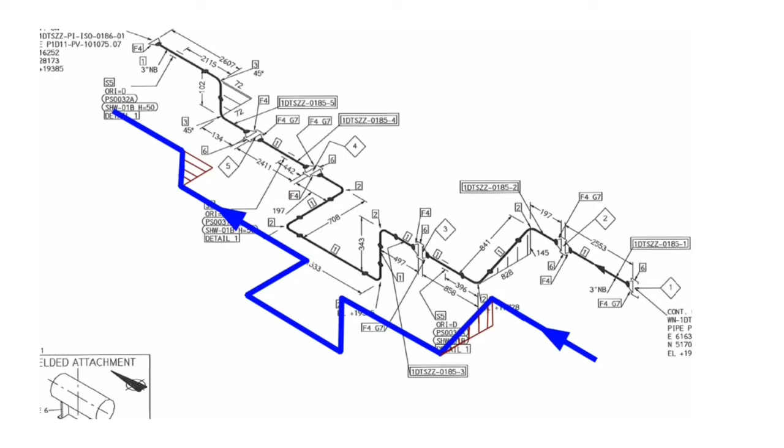We are pleased to provide you 6 different piping educational tutorials in this video.

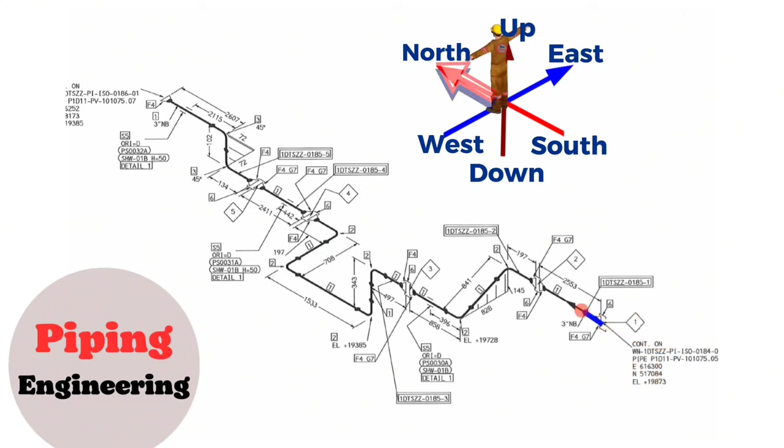At this point the pipeline first turns downwards with a 90-degree elbow, then turns westwards. Then the pipeline turns northwards with a 90-degree elbow. At this point, the pipeline turns downwards with a 90-degree elbow. Then the pipeline turns northwards with a 90-degree elbow again.

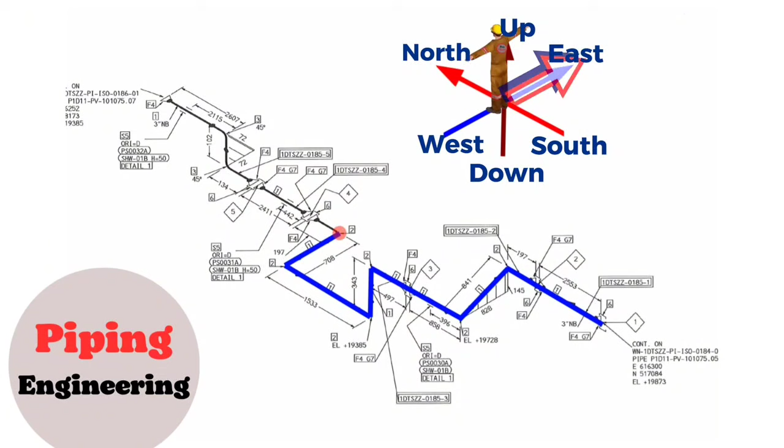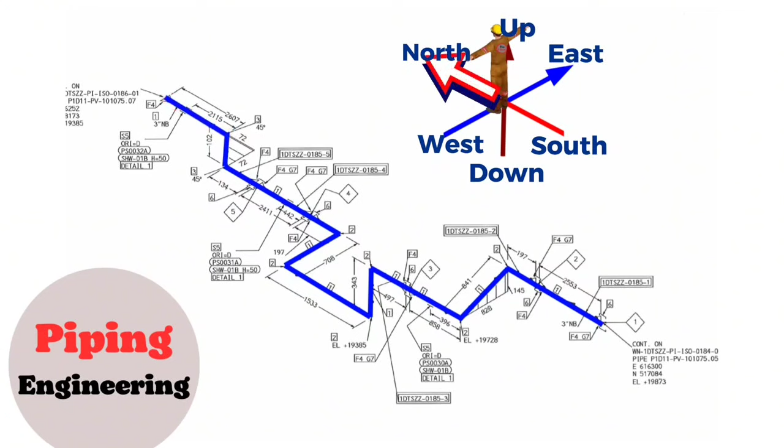At this point the pipeline turns eastwards with a 90-degree elbow. Then the pipeline turns northwards with a 90-degree elbow again. At this point the pipeline first turns eastwards with a 45-degree elbow, then turns northwards. At last the pipeline continues northwards with a 45-degree elbow again. And reading the piping isometric drawing is successfully completed.

I'm separating these bold lines that we've drawn along this pipeline from the isometric drawing and showing them separately so that the pipeline isometric drawing is easier to read and understand. By using this method, you can easily read and understand any piping isometric drawings. This education video is finishing here.

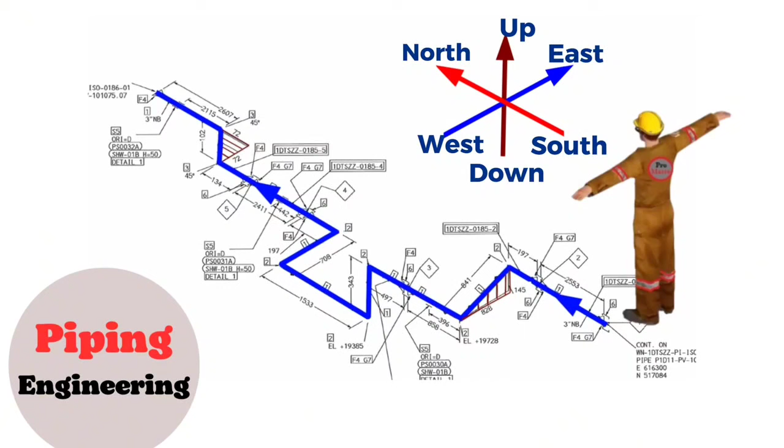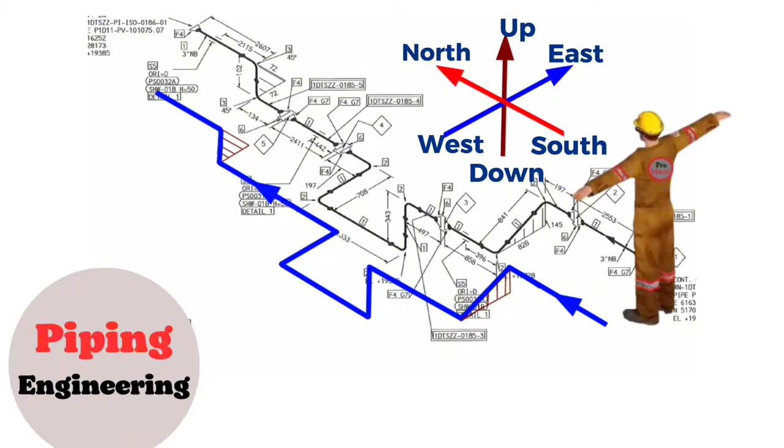We are continuing our tutorial with the next video. In this video, we will learn how to read a pipe drawing, the list of materials and directions on the drawing. Then we will bend the wire according to the pipe drawing. Also, at the end of the video, we have prepared a 3D view of this pipeline so that you can get an easier idea of the pipeline. Such videos help improve the knowledge and skills of pipe fitters.

This is the pipe isometric. This is the list of materials on the drawing. These are the directions. Let's find out the materials needed during the fabrication of this pipeline. These are the detail numbers of the materials on the drawing.

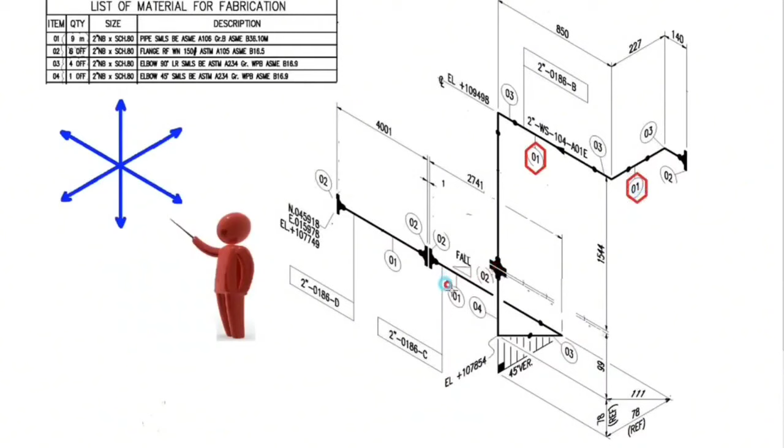These are detail number 1. We look at the material list. Detail number 1, 9 meters, 2 inch, schedule 80, pipe, ASME A106.

These are detail number 2. Let's look at the material list. Number 2, 6 pieces, 2 inch, schedule 80, flange, raised face, weld neck, class 150.

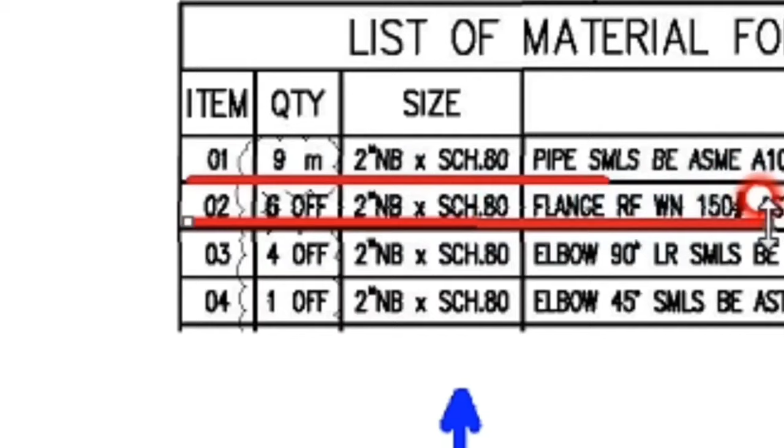These are detail number 3. Let's look at the material list. Detail number 3, 4 pieces, 2-inch, schedule 80, elbow, 90-degree, long radius.

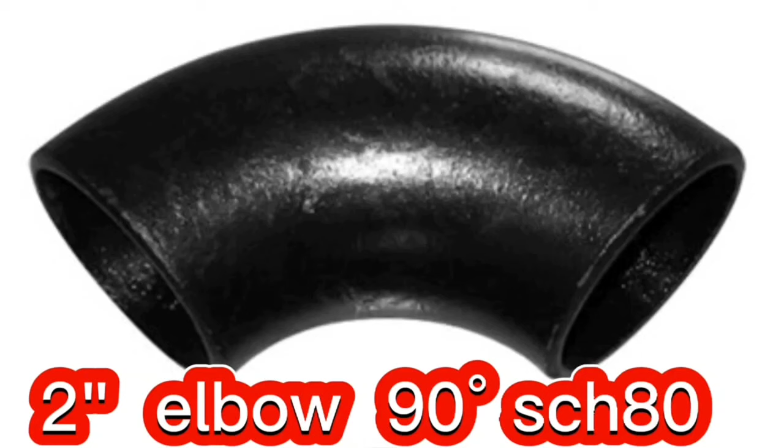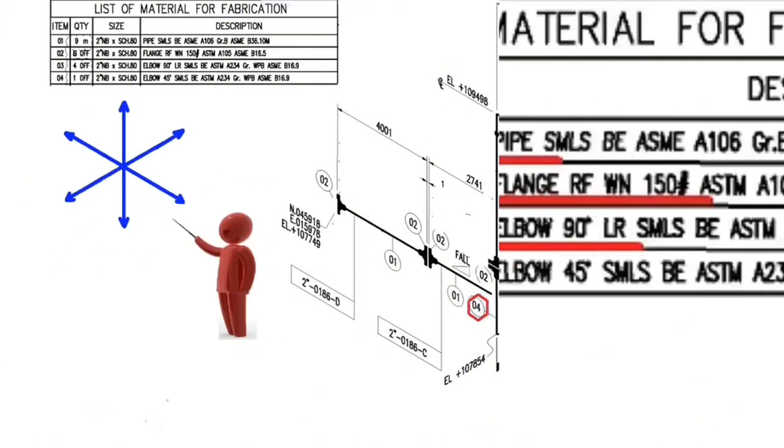This is number 4, the last detail. We look at the material list. Detail number 4, 1 piece, 2 inches, schedule 80, 45-degree elbow.

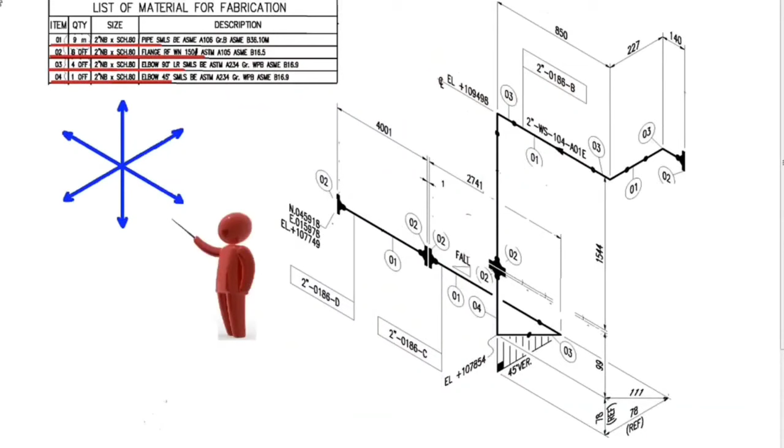To read the drawing correctly, we must first learn these directions. These are the lines that show the directions. This is the north. This is the south. This is the east. This is the west. This is the up. This is the down.

A person who wants to read a drawing should imagine himself at the intersection of these directions. Then that person's face will look to the north. His back will look to the south. His right hand will look to the east. And his left hand will look to the west. His head will be up and his feet will be down.

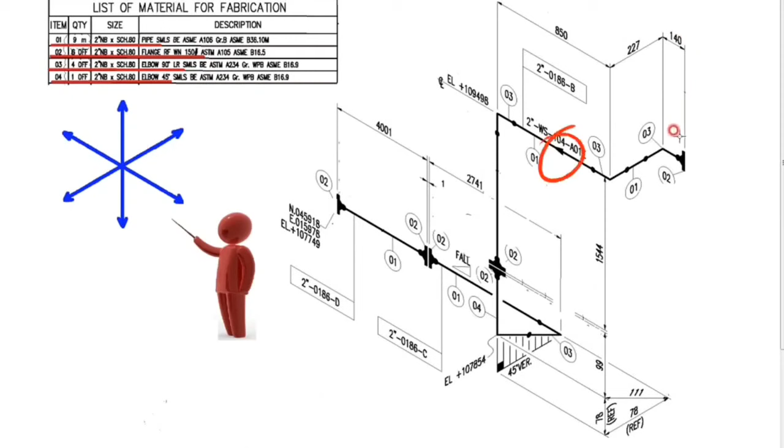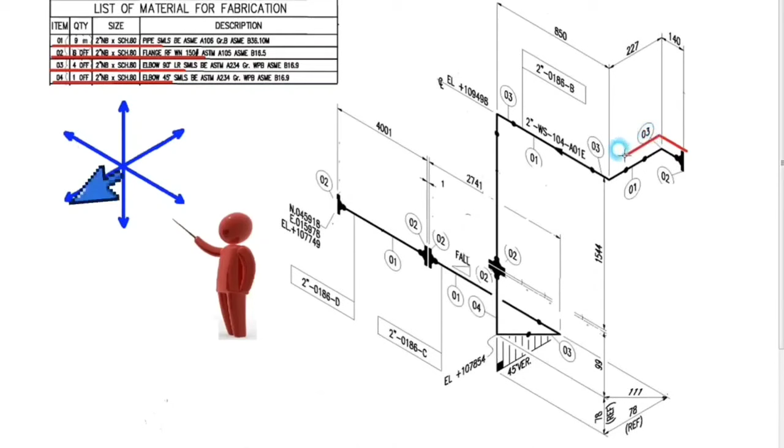Let's read the pipe drawing with the help of these directions. There is an arrow on the pipe, so let's read the pipe drawing in that direction. First, the pipe goes to the north. Then the pipe goes to the west. Then the pipe turns to the north again.

Then the pipe goes down. After this point, we continue down. From this point it turns east at an angle of 45 degrees. Finally, we are going to the north. We finished reading the pipe drawing.

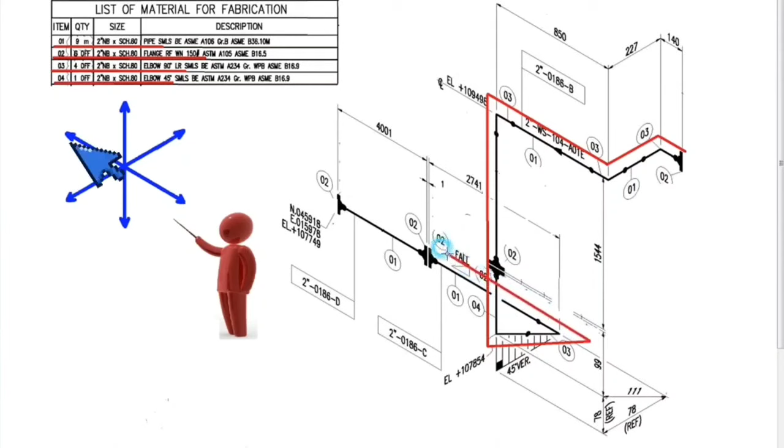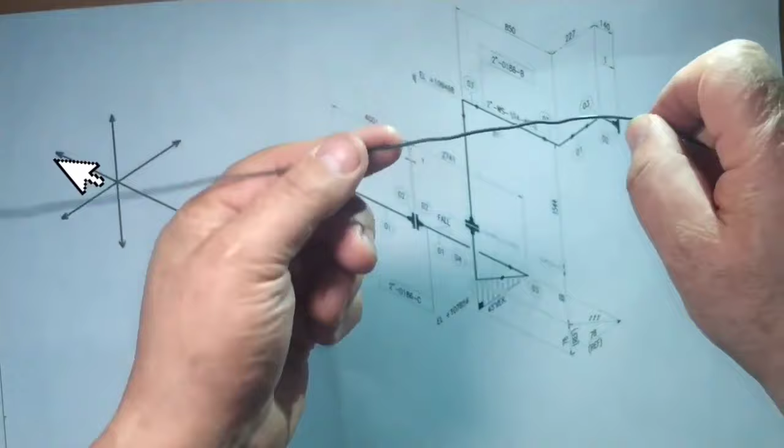Let's bend the wire according to the pipe drawing. This is our wire. Let's bend the wire of this pipe isometry with the help of these directions. We hold the wire in the north direction. Then we bend the wire in the west direction. Then we bend the wire again to the north direction.

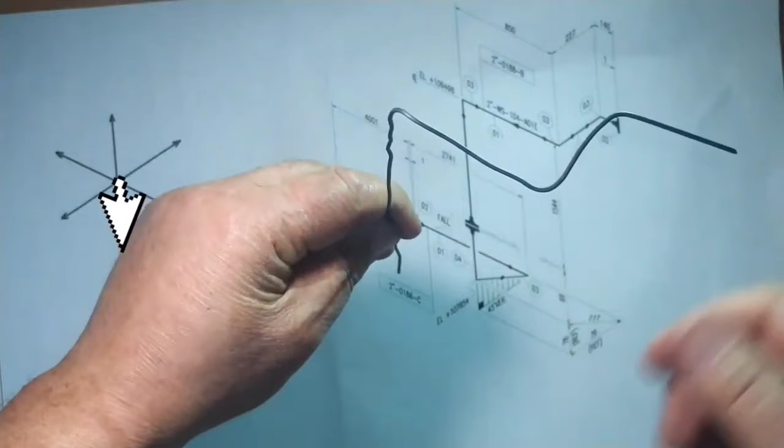Then we bend the wire down. From this part, we bend the wire down east, at an angle of about 45 degrees. Finally, we bend the wire to the north direction. Wire bending is finished.

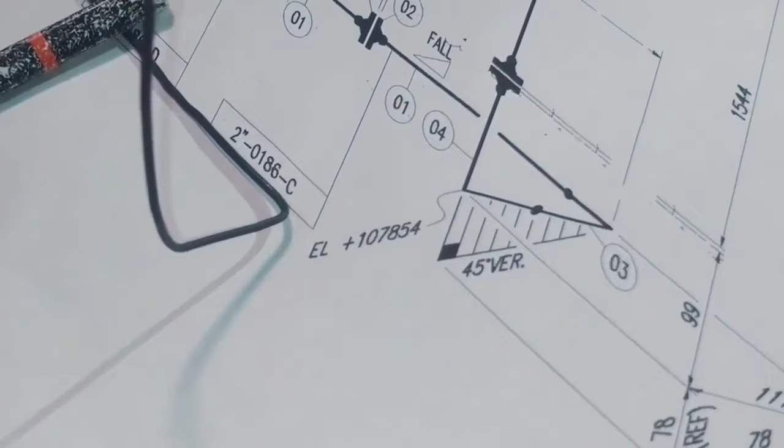Let's look at the 3D model of pipe isometrics. This view helps to fully understand pipe isometrics.

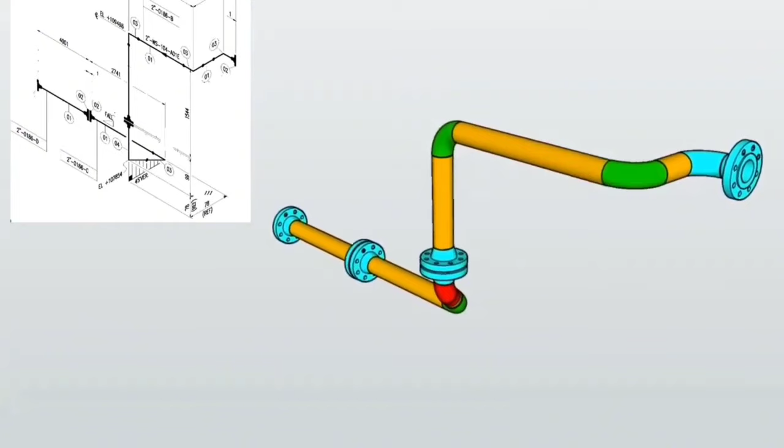We are continuing our tutorial with the next video. In this video we will learn reading the pipe drawing easily and watch a 3D model of a pipeline isometric. This video is very useful information for pipe fitters. You can easily learn pipe drawing if you watch the video carefully. A good knowledge of piping drawings helps pipe fitters succeed in job interviews.

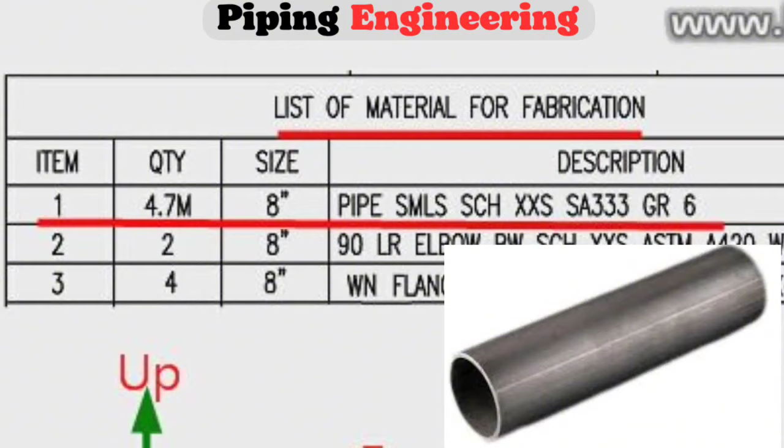Item number 1, 8-inch pipe. Schedule is XXS, the material is carbon steel, SA333 grade 6. Total length used 4.7 meters. Detail number 2 was used in two places in the pipe drawing. Let's look at the material list.

Item number 2. The size is 8-inch. Elbow 90 degree, long radius, schedule is XXS, ASTM A420, the quantity 2 pieces. Detail number 3 was used in 4 places in the pipe drawing. Item number 3 is 8-inch weld neck flange, A350, the quantity is 4 pieces.

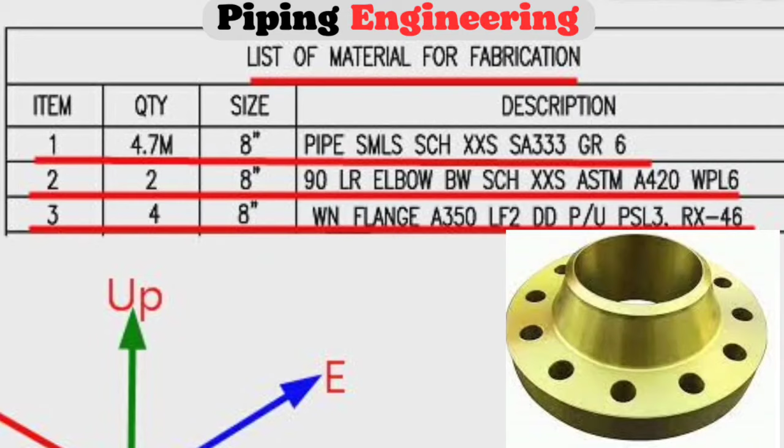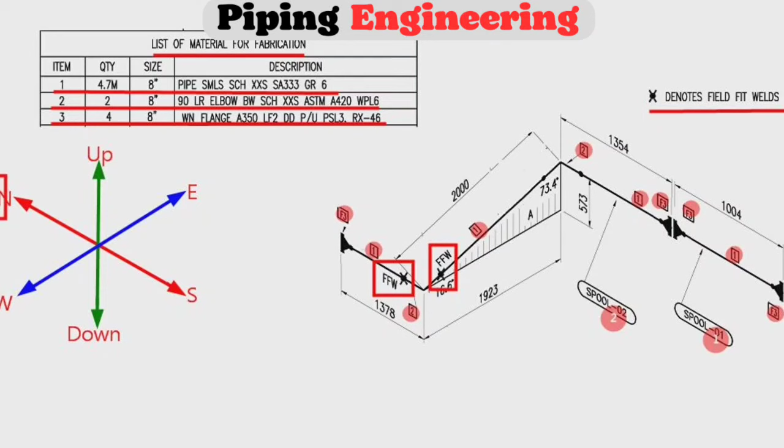Every pipe drawing has such a sketch; this indicates the directions. By studying these directions, we can easily read any pipe isometric. There are 6 directions here. N stands for north. S stands for south. E stands for east. W stands for west. Up stands for up. Down stands for down. Let's try to read this pipe isometric using these directions.

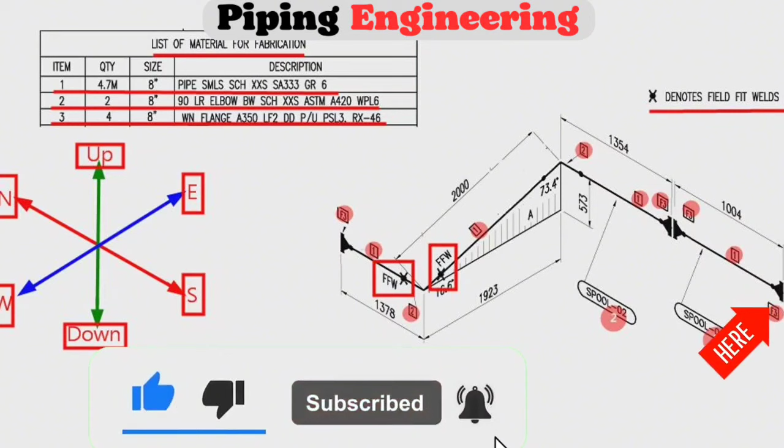We will start reading the piping isometric from this point. The pipeline travel starts from this point to the north direction. Then the pipeline travels down 573 mm, then turns to the west direction for 1923 mm. At this point, the pipeline travels to the north direction. So, the correct reading of the pipe drawing is completed.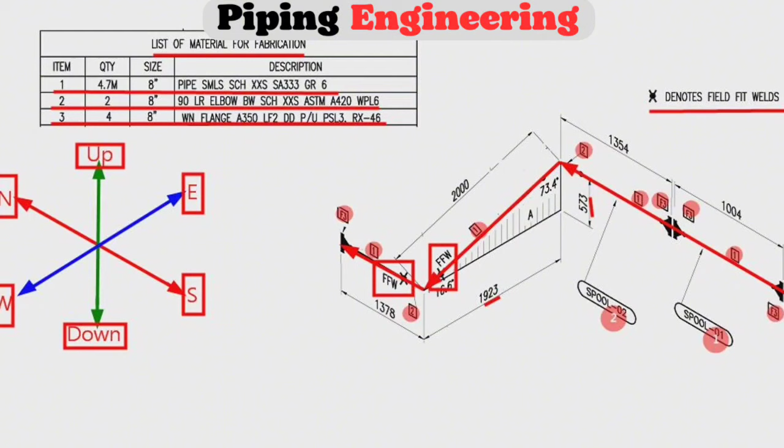Let's look at the 3D model view of this pipeline. The 3D view of the pipeline helps us understand pipeline isometry more easily.

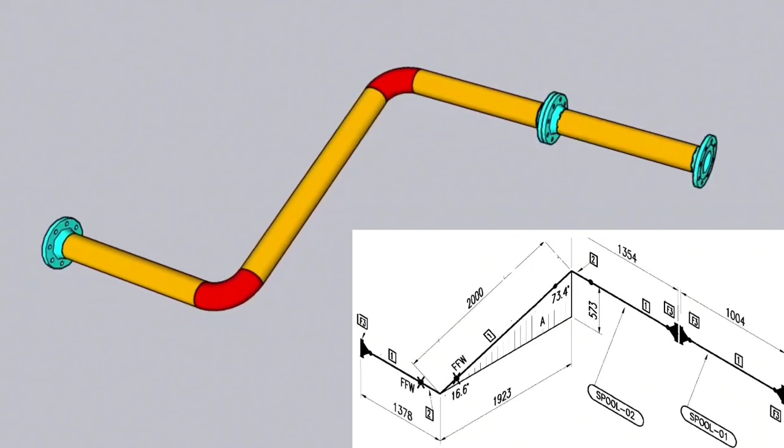In the next video, in this video we will learn reading the pipe drawing correctly and watch a 3D model of the pipe isometric. Then we will bend the wire in the pipe drawing according to the rule we learned. This is very useful information for pipe fitters. Let's start the video. This is the pipe isometric drawing.

This is the list of material for fabrication. In this drawing there are two separate pipe spools. This is the first spool. This is the second spool. Let's learn the materials which are used in the pipeline. Detail number 1 was used in several places in the pipe drawing. Let's look at the material list.

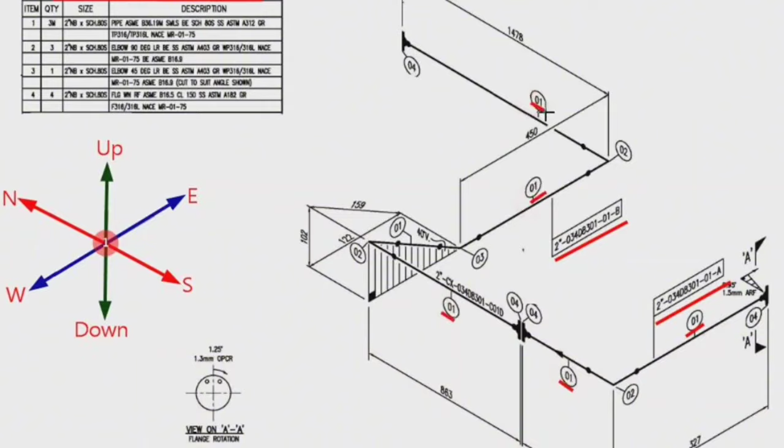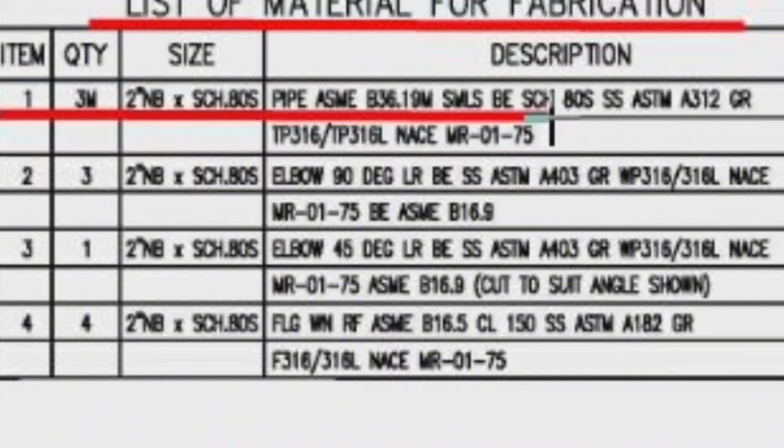Item number 1: the quantity is 3 meters, 2 inch schedule 80S pipe, the material is stainless steel. Detail number 2 was used in 3 places in the pipe drawing. Item number 2: the quantity is 3 pieces, 2 inch, schedule 80S, elbow, 90 degree, long radius, the material is stainless steel.

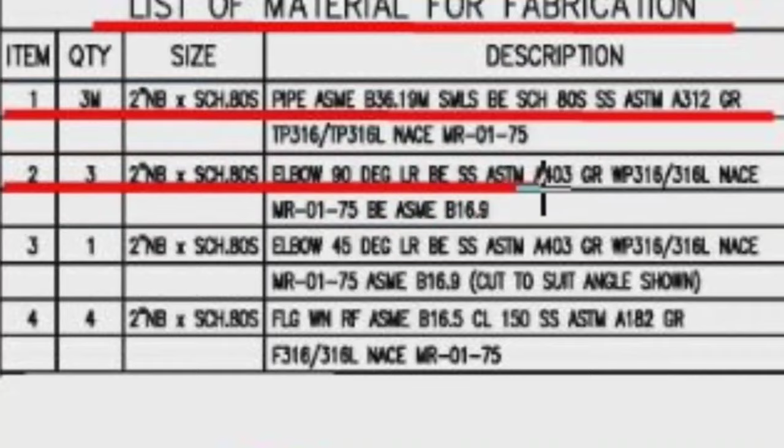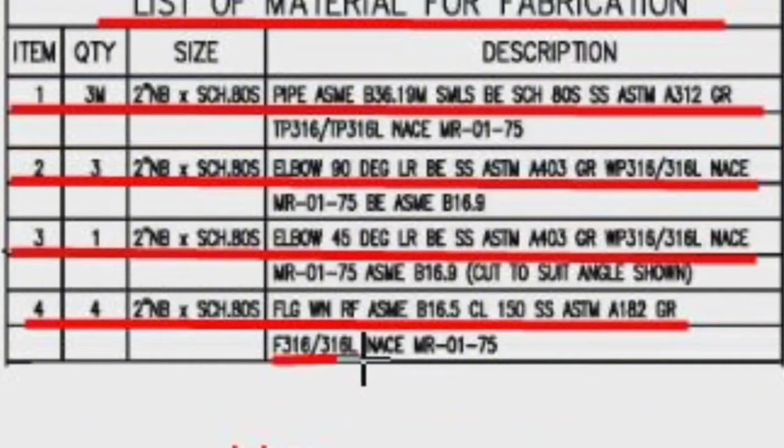Detail number 3 was used in 1 place in the pipe drawing. Item number 3: the quantity is 1 piece, 2 inch, schedule 80S, elbow, 45 degree, long radius, the material is stainless steel. Detail number 4 was used in 4 places in the pipe drawing. Item number 4: the quantity is 4 pieces, 2 inch, schedule 80S, flanges, weld neck, raised face, class 150, the material is stainless steel, grade 316L.

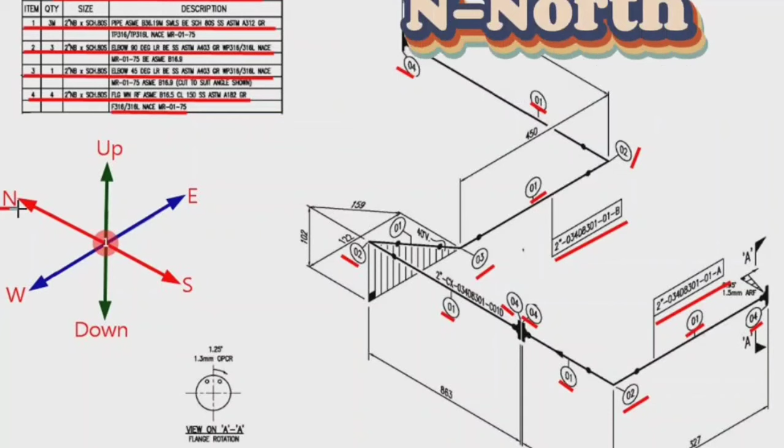Every pipe drawing has such a sketch; this indicates the directions. By studying these directions, we can easily read the pipe isometric. There are 6 directions here. N means north. S means south. E means east. W means west. Up means up. Down means down.

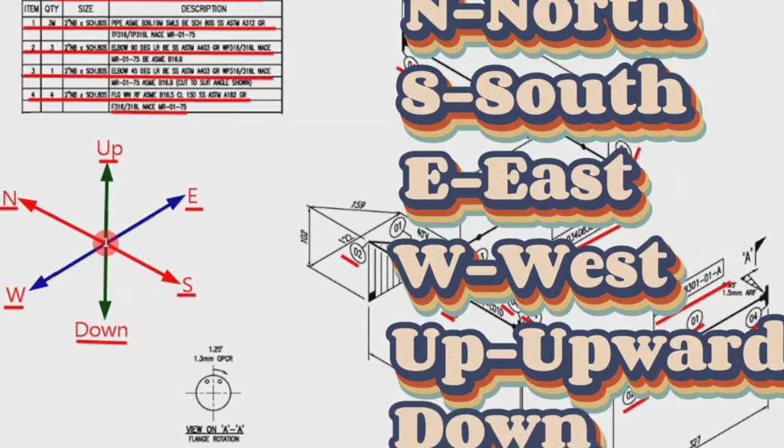Let's try to read this pipe isometric using these directions. We will start reading the pipe isometric from this point because the arrow on the pipe drawing is in this direction. The pipe travel starts from this point to the west direction. Then the pipe travel turns to the north direction. The pipe will move from this point first downward, then eastward, at an angle of 40 degrees. At this point, the pipe travel continues to the east direction. At last the pipe turns to the north direction and the correct reading of the pipe drawing is completed.

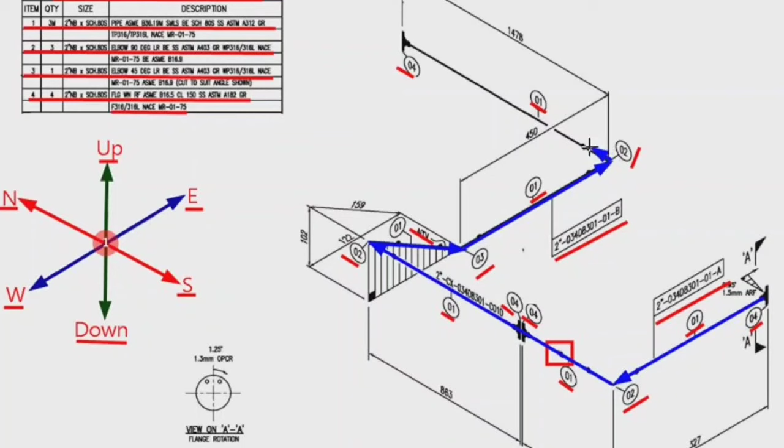An additional view is given in this part of the drawing related to the rotation of the flange holes. Section AA. This view is explained here. That is, view AA shows that the holes of the flange will rotate to the right by 1.3 millimeters.

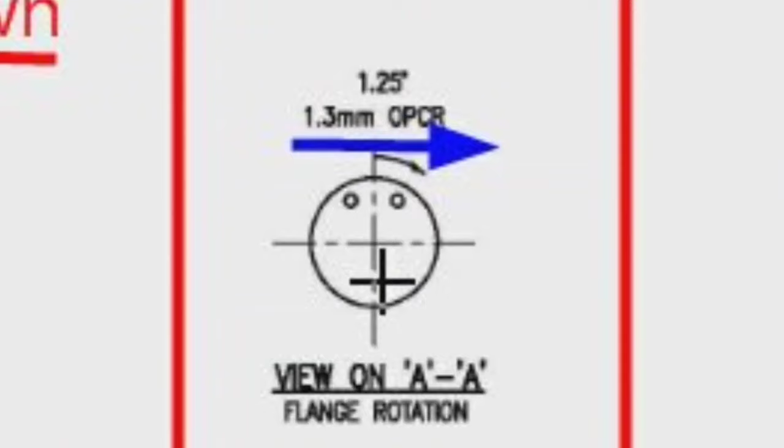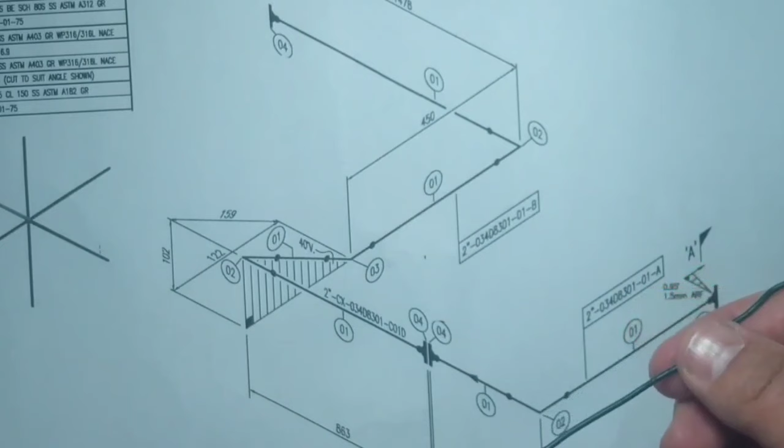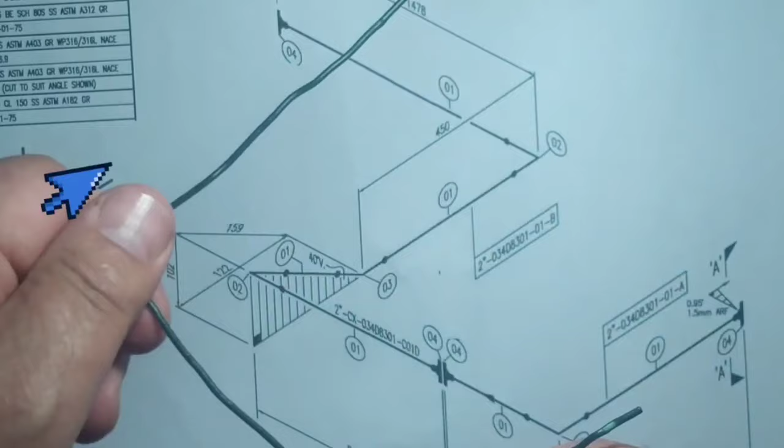Now let's bend the wire of this pipe drawing. This is our wire, the sketch showing these directions, and this is the pipe isometric drawing. With the help of this sketch, let's bend the wire of the pipeline. Since the pipeline is traveling to the west direction, we hold the wire in the west direction. Then the wire bends first to the north. Then the wire bends down and then to the east. Then the wire continues eastwards. At last our wire turns northwards. And so, the wire bending process is completed.

In this video we will learn reading the pipe drawing easily and watch a 3D model of the pipeline isometric. This video is very useful information for pipe fitters. You can easily learn pipe drawing if you watch the video carefully. A good knowledge of piping drawings helps pipe fitters succeed in job interviews.

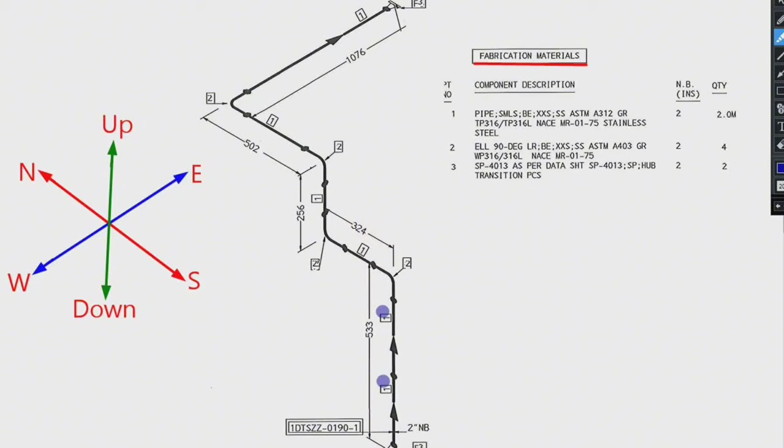Let's start the piping tutorial video. This is the pipe isometric drawing. This pipeline consists of one spool only. Let's learn the materials which are used in the pipeline. This is the list of materials for fabrication. Detail number 1 shows pipe. It was used in several places in the pipe drawing. Let's look at the material list.

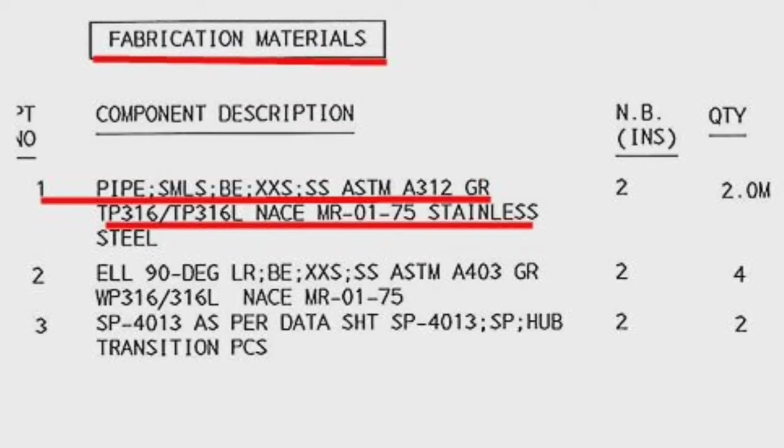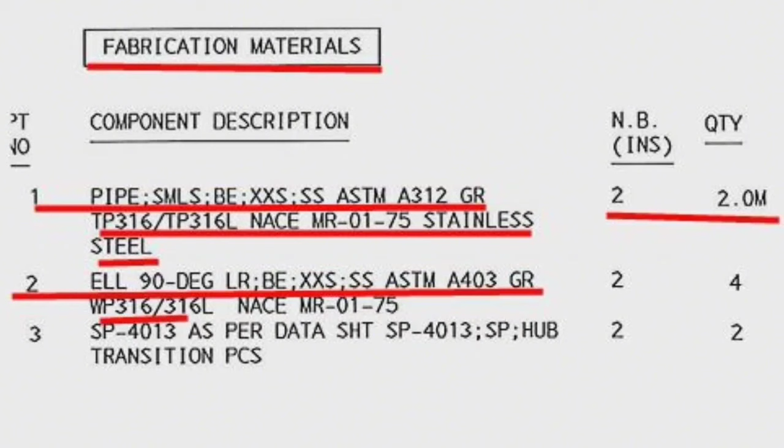Item number 1: pipe, schedule XXS, the material is stainless steel, the size is 2 inch, total length used 2 meters. Detail number 2 was used in 4 places in the pipe drawing. Let's look at the material list. Item number 2: elbow 90 degree, long radius, schedule XXS, the size is 2 inch, the material is stainless steel, the quantity is 4 pieces.

Detail number 3, in the pipe drawing. Item number 3, Galperti standard hub transition flange, the quantity is 2 pieces.

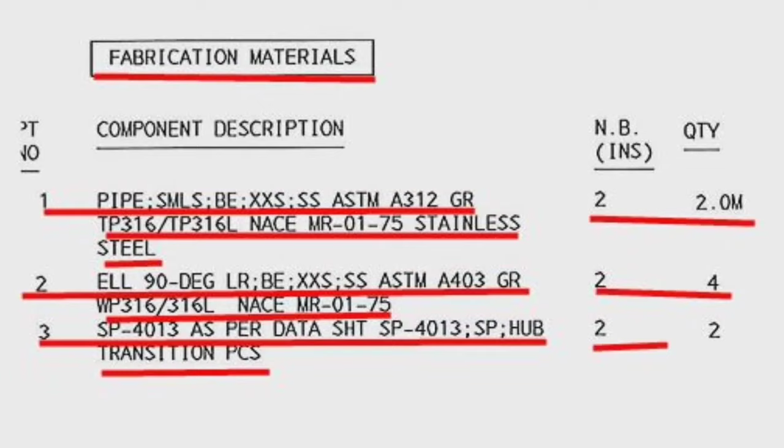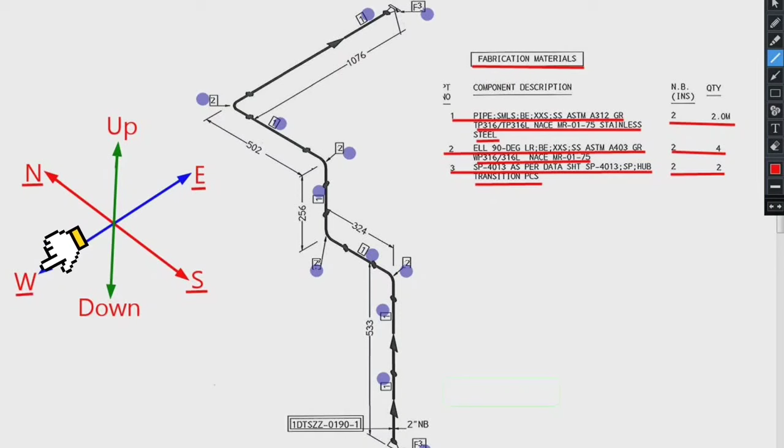Every pipe drawing has such a sketch, this indicates the directions. By studying these directions, we can easily read any pipe isometric. There are 6 directions here. N stands for north. S stands for south. E stands for east. W stands for west. Up stands for up. Down stands for down directions.

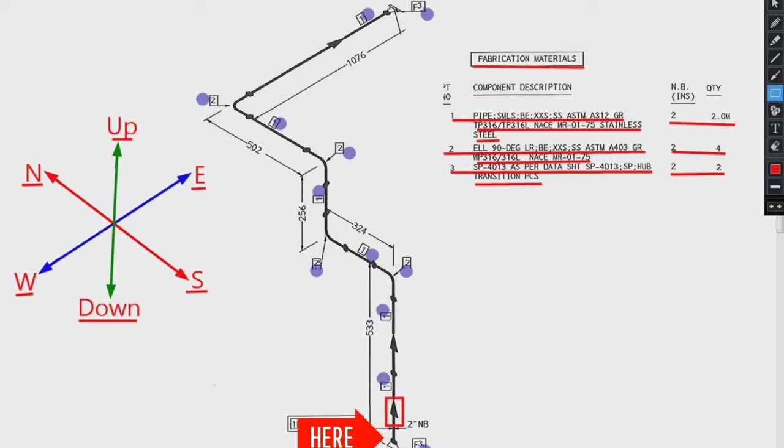Let's try to read this pipe isometric using these directions. We will start reading the piping isometric from this point because the direction of the arrow on the pipe drawing is in this direction. The pipeline travels from this point upward. Then the pipeline travels to the north direction. Then the pipeline moves upwards.

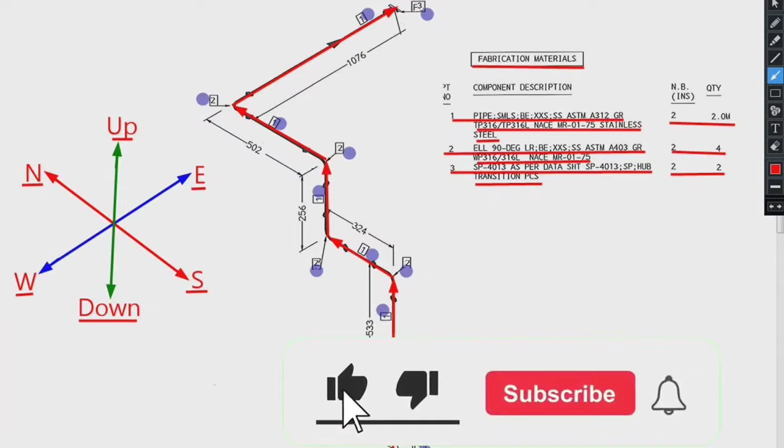Then the pipeline travels to the north direction. At this point, the pipeline travels to the east direction. So, the correct reading of the pipe drawing is completed. Let's look at the 3D model view of this pipeline. The 3D view of the pipeline helps us understand pipeline isometry more easily.

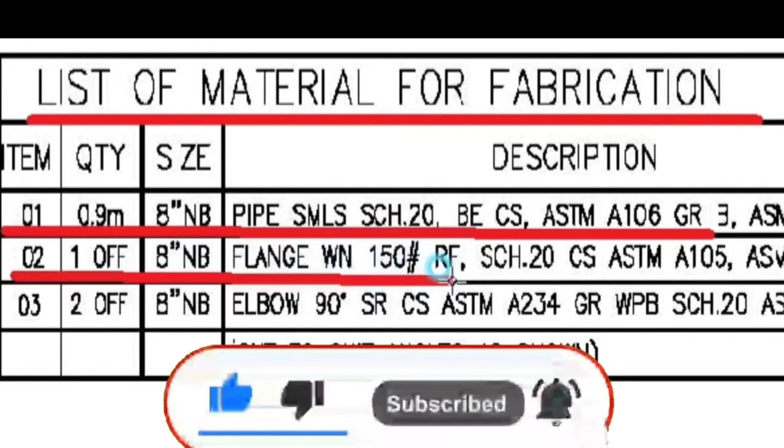Let's look at detail number 2. Item number 2, the quantity is 1 piece, 8 inch flange, weld neck class 150, raised face, Schedule 20, carbon steel. Let's look at detail number 3. Item number 3, 2 pieces, 8 inch elbow, 90 degree, short radius, carbon steel, Schedule 20.

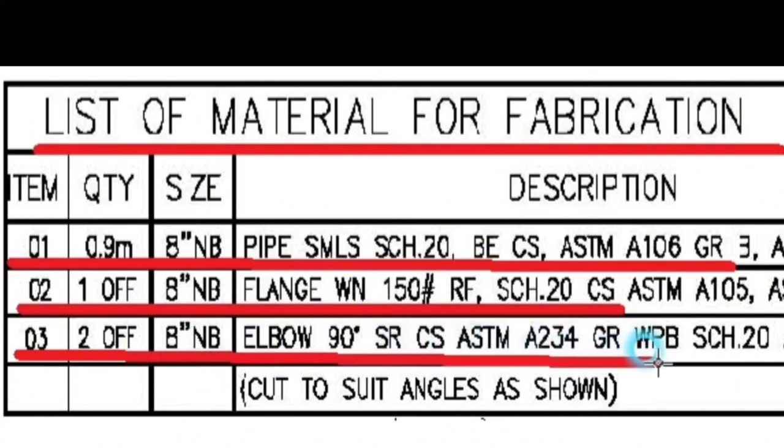Let's try to read the pipe isometric correctly. There are 3 turns in the pipe drawing. These are 13.8 degrees vertical, 12.8 degrees horizontal, and 45 degrees vertical turns. We will start reading the pipe drawing from this point. We move up along the dashed line, then we move to the east along the dashed line.

From this point it travels to the south, then turns 12.8 degrees horizontally to the east, then along the dashed line, travels up. After this point the pipe goes to the east.

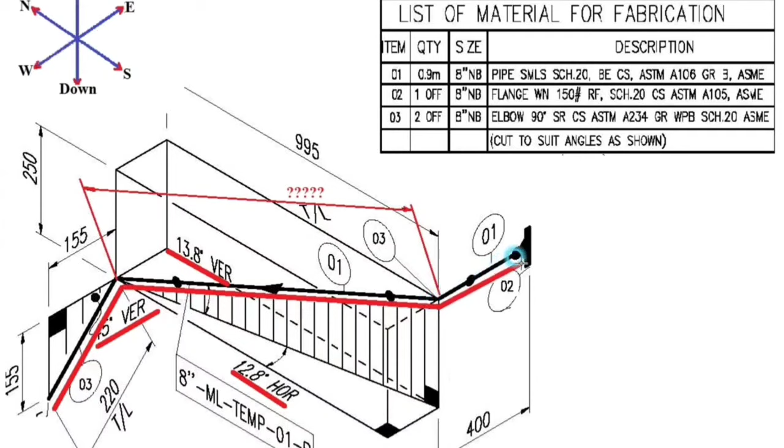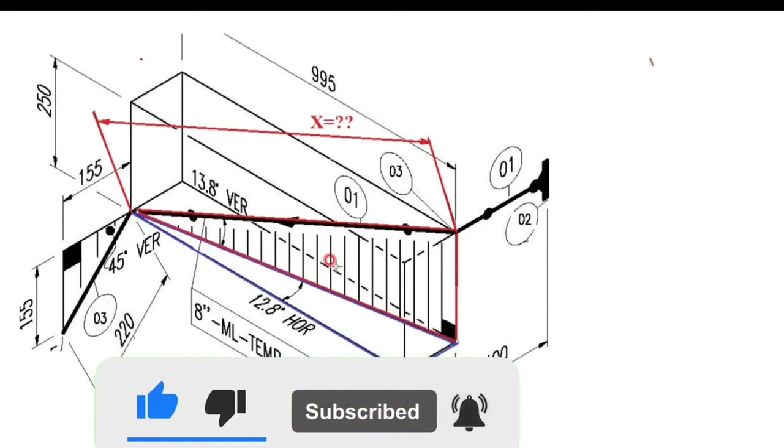Let's calculate this dimension, which is indicated by the red line in the pipe drawing, that is, we will calculate the distance from the center of the elbow to the center of the elbow. This line is a diagonal of a parallelepiped. There are 2 triangles here, one marked with a red line and the other with a blue line. The hypotenuse of the blue triangle is the cathetus of the red triangle. We need to find the hypotenuse of the red triangle.

Let's first find the hypotenuse of the blue triangle. This side of the blue triangle is equal to the side of the parallelepiped. The length of the side of the parallelepiped is 995, so the base of the blue triangle will also be 995. Using the Pythagorean theorem, add the square of 220 to the square of 995 to find the length of the hypotenuse of the blue triangle. We calculate and find that the length of the hypotenuse of the blue triangle will be 1019.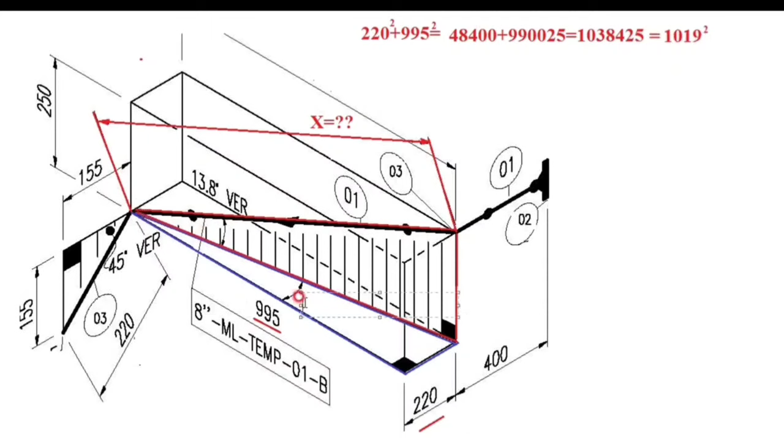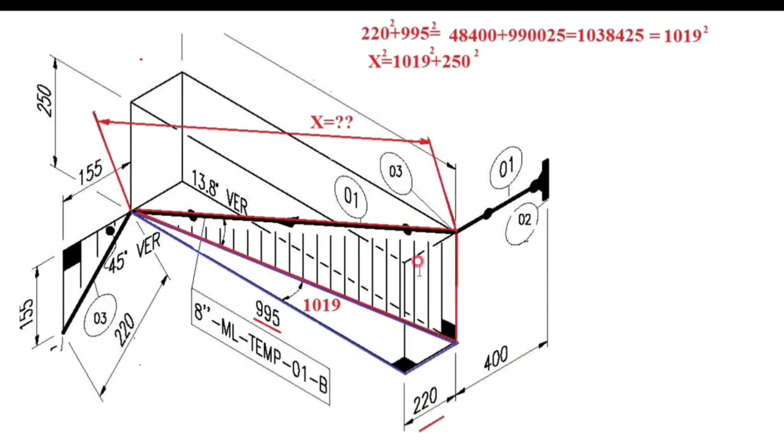And at the same time, 1019 is the cathetus of the red triangle. The length of one side of the red triangle is 1019, and the length of the other side is 250. Using the Pythagorean theorem, the length of the hypotenuse of the red triangle can be calculated. The square of the hypotenuse of the red triangle will be equal to the sum of the square of 250 and the square of 1019.

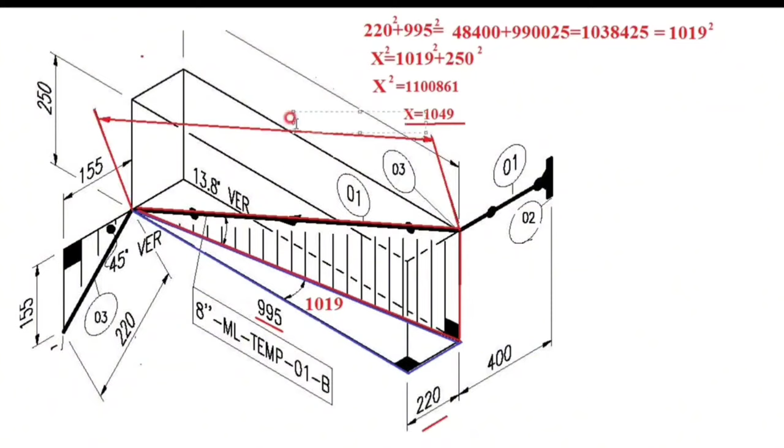We calculate and find that the length of the hypotenuse of the red triangle will be 1049, and at the same time this measurement is the distance from the center of the elbow to the center of the elbow that we were required to find. You can also calculate any dimensions on pipe drawings by applying this rule.